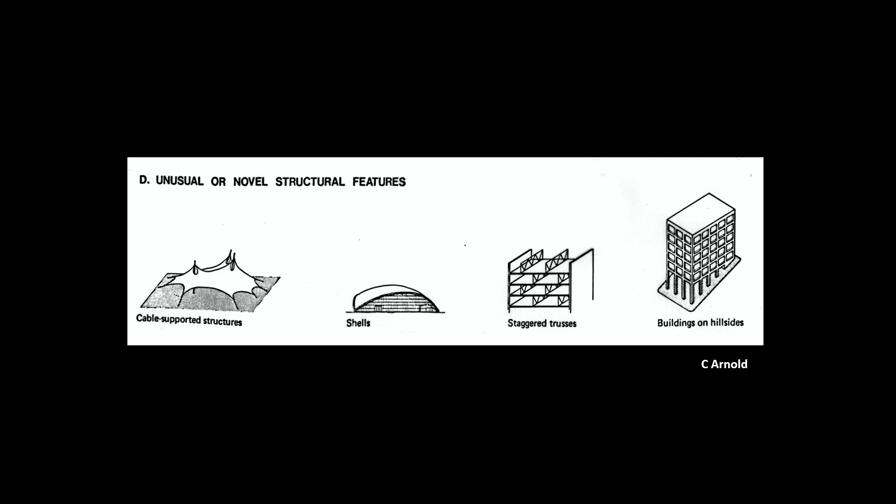In the words of Geoffrey Wood, one of the five founding partners of Ove Arup Partners: earthquake-resistant design is really a problem for architects.

Several years ago, the Institution of Structural Engineers Caribbean Regional Group, with support from the Pan American Health Organization and Dr. Van Alphen, hired Luigi Desano to deliver a series of three lecture programs - three-day courses held in Jamaica, Barbados, and Trinidad on base isolation. The first day of those courses was devoted to architecture. We invited the Barbados Institute of Architects, the Trinidad and Tobago Institute of Architects, and the equivalent body in Jamaica to attend. Not one single architect attended any of the courses in Jamaica, Barbados, or Trinidad.

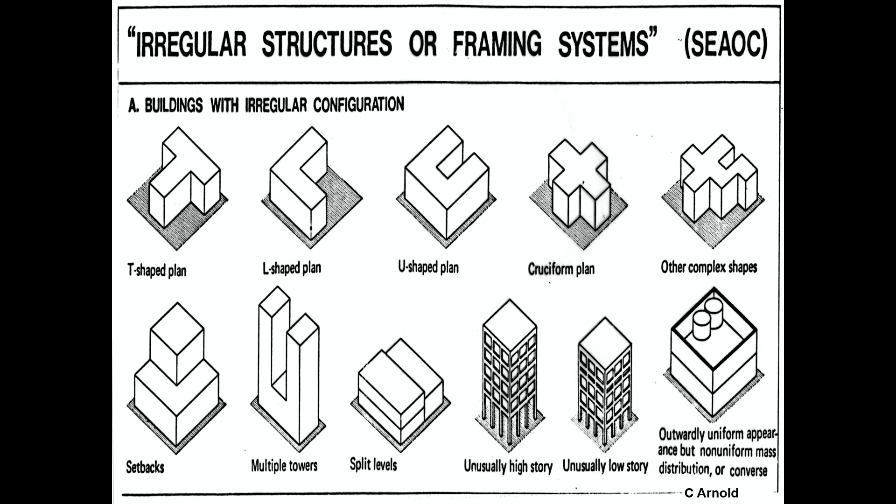But Geoffrey Wood said earthquake-resistant design is really a problem for architects. So either the architect has a better than usual knowledge of the basic principles of the conceptual design of earthquake-resistant systems, or the architect should involve the structural engineer in the initial discussions and development of the building concept.

That's the Central Bank in Barbados. It's not a correct representation because our Prime Minister, Tom Adams, at the time thought the building was too short. So after the model was built, he told the architect to add two floors - the actual building is two floors taller than that. But before Mervyn Awon, the architect, drew a line, Mervyn and I spoke about the building for two weeks. In those two weeks, Mervyn conceptualized the building in such a way that it made my life a lot easier in designing the structure. And the extra overcost of earthquake-resistant design of the structure, over simple gravity loads, was $0.

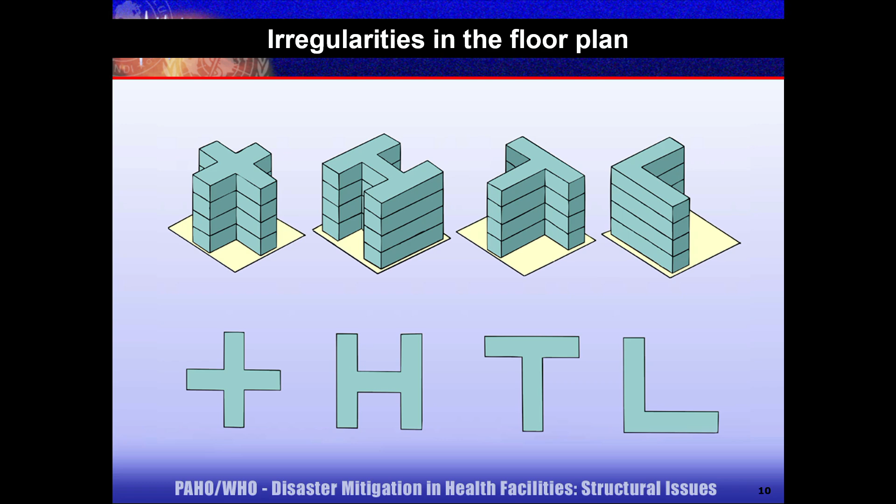Another famous engineer, Henry Degenkolb, who lectured in Trinidad in 1978 for a major conference at the Hilton, is emphatic in stressing the importance of configuration. He says: if we have a poor configuration to start with, all the engineer can do is improve a basically poor solution as best he can. Conversely, if we start off with a good configuration and a reasonable framing scheme, even a poor engineer can't harm its ultimate performance too much - so if you have poor engineers, make sure you have a good configuration. This last statement is only slightly exaggerated.

So what I have said so far warrants discussion among the various disciplines involved in the design and building processes. A Nicaraguan architect called Terran recommends that buildings be simple, continuous, symmetrical, straightforward, and repetitive. This advice is given not as an absolute, but as a qualitative factor that influences the reliability of the structure. Terran asks for understanding and knowledge among the disciplines, not the imposition of mandatory constraints.

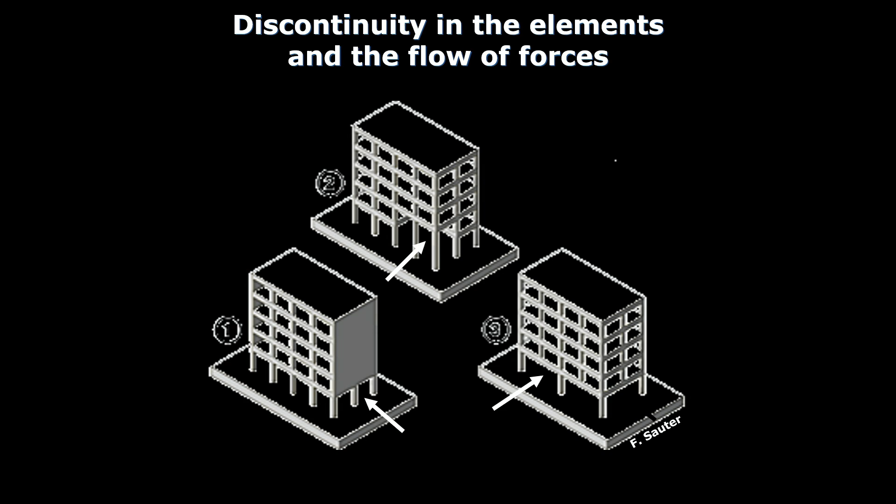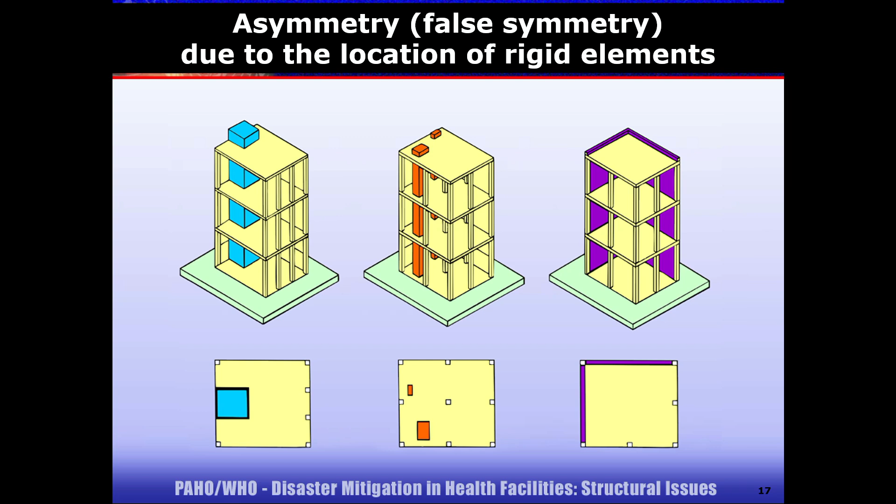Those slides and several others come from a very good package of slides from the Pan American Health Organization. It's the health sector that's interested in safe buildings, not the Ministry of Works, the Ministry of Health.

Now, that's a hotel at Heathrow Airport in London. That's a perfect shape for earthquakes. That circular hotel has shear walls around the perimeter, in a perfect location for resisting torsional forces. It's symmetrical. I don't think the engineer and architect were concerned about earthquakes, but accidentally they produced a perfect earthquake-resistant design for that aerial hotel at Heathrow.

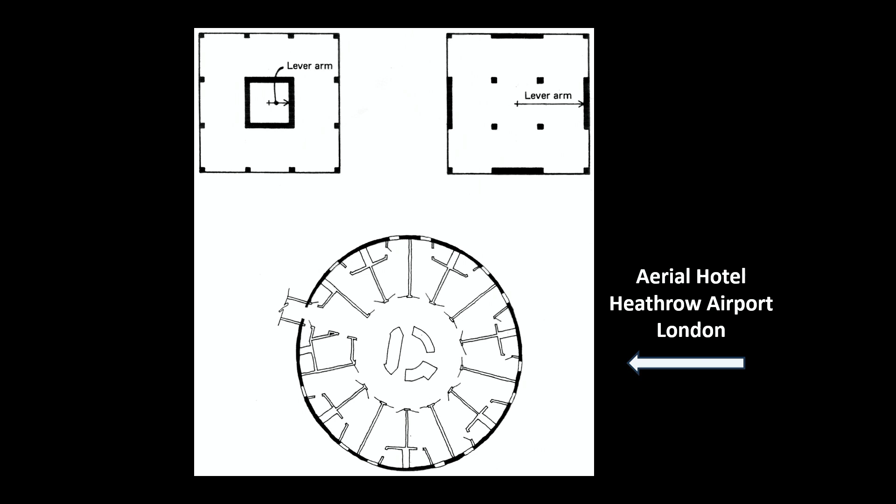I think Luigi spoke about soft stories at the Olive View Hospital. In the 1971 San Fernando earthquake, over 90% of the deaths occurred in hospitals, which is interesting. Olive View was rebuilt after that earthquake, to the best standards available in 1971. Then in 1994, when the Northridge earthquake occurred, Olive View Hospital was closed for a month to patients.

So even the best standards are insufficient if you don't have base isolation, because earthquake resistance depends on the failure of elements to absorb the energy. Soft stories kill people. They killed 18,000 people in the Izmit earthquake in Turkey in 1999.

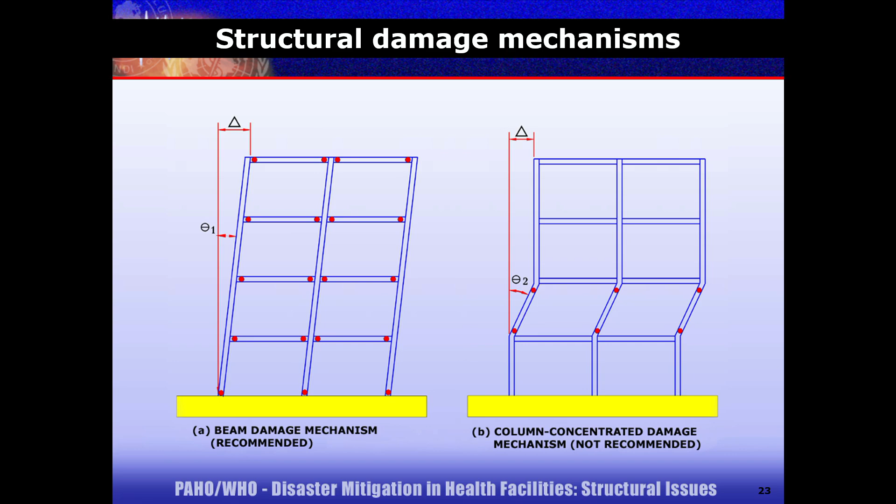Of course, most of a building is non-structural. Most of this building is non-structural, so we should really pay attention to the non-structural components as well. And that's outside of the realm of engineers.

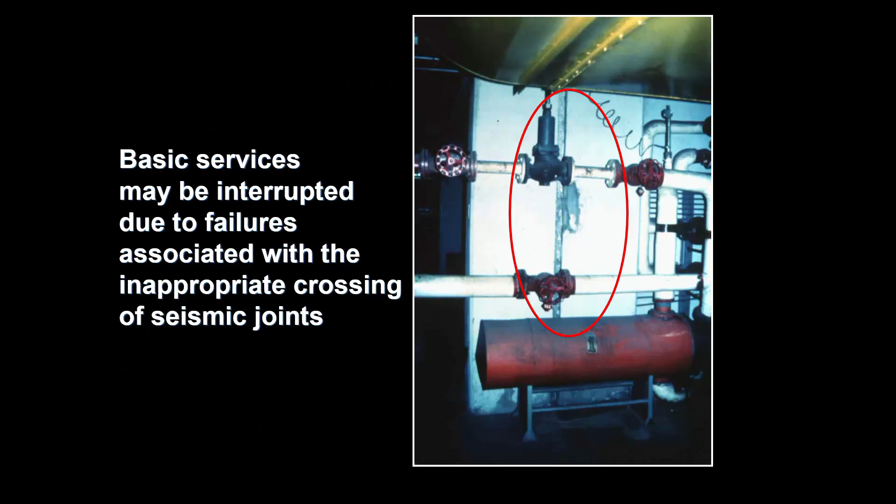This particular building is interesting because it has a 200 millimeter separation joint from the top to the bottom. It's a 15-story building. That's for earthquakes, so that one side of the building does not clash against the other side during an earthquake.

But the corridor between the bedrooms on both sides of the building has a ceiling that runs continuously across that joint. There have been four earthquake events in the 50-year history of this building, which opened in 1974. In the first event, the ceilings broke on every one of the 10 bedroom floors, and you saw this gash in the corridor, which alarmed the management, and they called our office in Trinidad and said, come and see what's happening—the building is falling apart, breaking in half.

So we came, and our report explained to them that there's a big joint there, but the architect had put a continuous ceiling across it. So it was just a ceiling to be repaired.

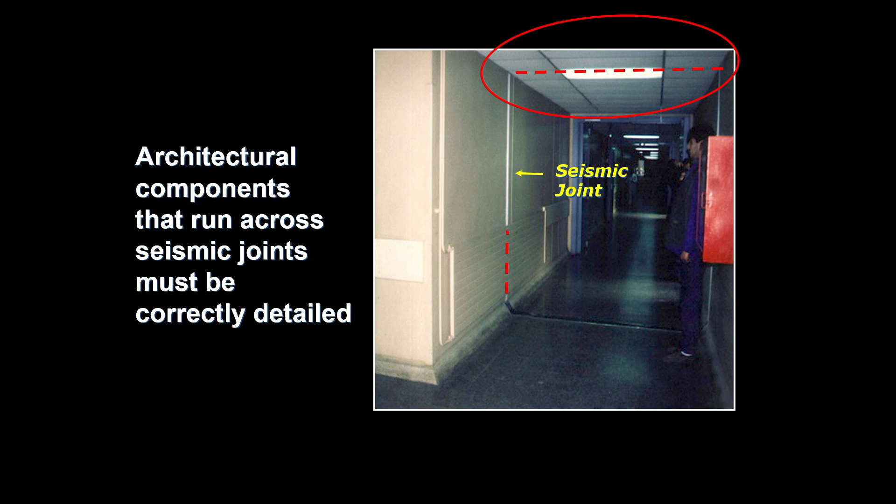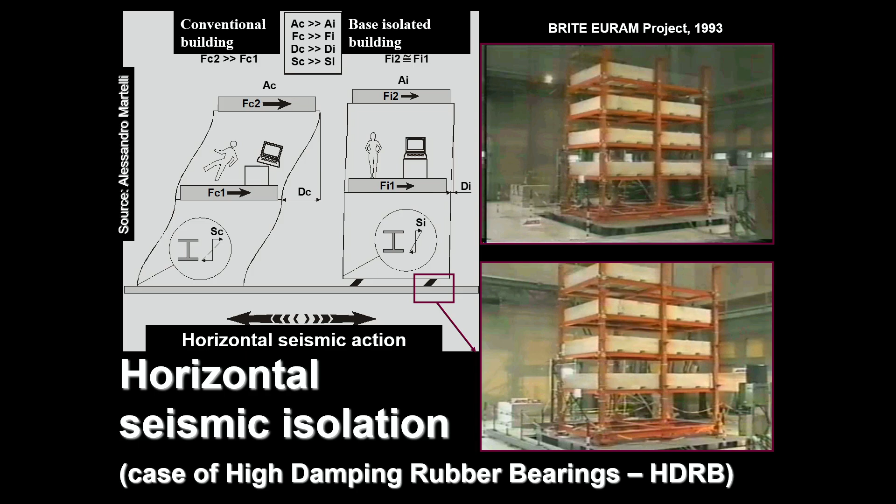And if you have an irregular building, then you go to Luigi and get it base isolated—or Shalini is doing that these days. That's a solution for those who want irregular buildings. By having base isolation, you avoid the excitement of being in a non-base isolated building. So which one would you prefer to be in—do you want the excitement, or do you want to have a dull life? You see.

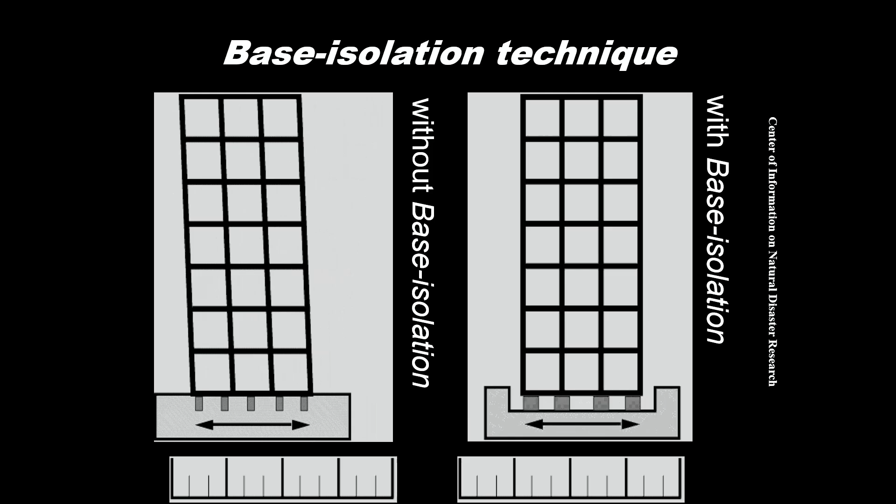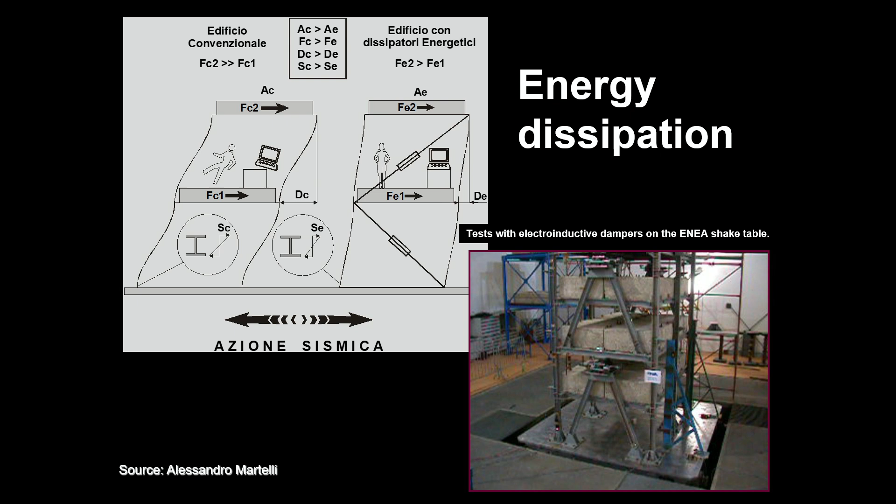So there are other ways of dealing with this. You could have energy dissipation with mechanical devices. I think I can show you some of those mechanical devices if I get this thing to work.

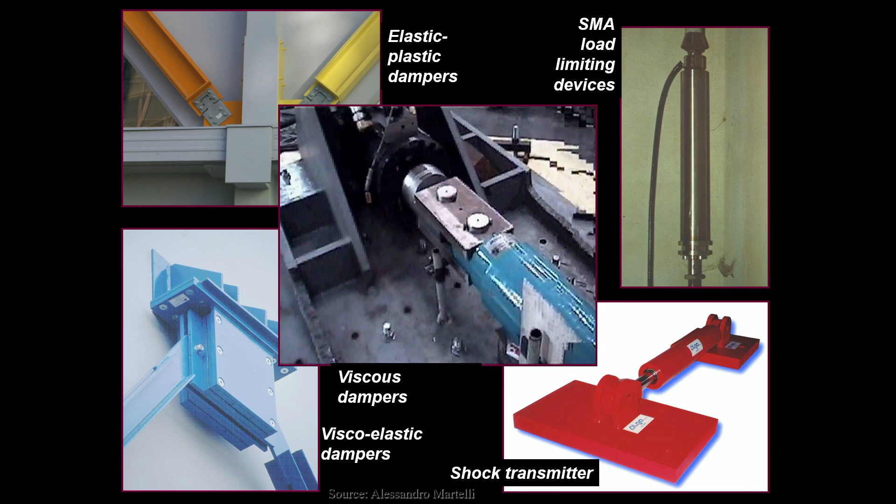The thing is to absorb the energy. After the Mexico City earthquake in 1985, the following year I went to Mexico City for a one-year commemorative conference. In the Social Security building, I saw that yellow thing there. There's a yellow device there, similar to what Luigi showed, to absorb the energy of the earthquake. That's a retrofit method.

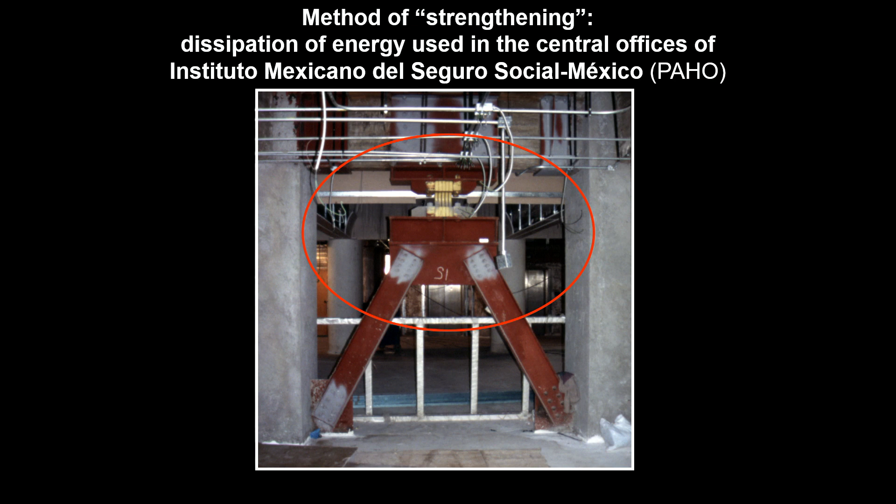That's really all I'm going to say, but my co-author will examine the problems for the architectural designer when confronted by earthquake hazard and some of the possible solutions to these problems. In the past 30 years, there's been inadequate attention to the earthquake hazard by the engineering community, and almost none by the architectural profession. It is hoped that in the next 30 years we will see all disciplines among design professionals paying much greater attention to earthquakes and much more collaborative design at the early stages of projects. Thank you.

As you are all structural engineers, most of you, you are the problem solvers. Today you've posed and given me a problem because I now start at the time I should be finishing. So I beg you to bear with me. As architects, we are usually the problem creators for the structural engineering, but however, we are problem solvers for other factors. So today I will attempt to explain to the engineers some of the problems, the reasons for the problems, and crave your understanding.

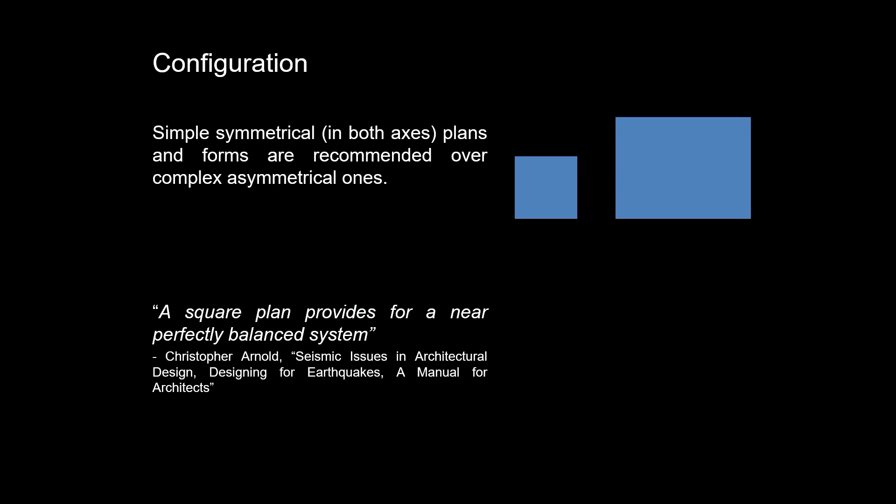From a seismic performance standpoint, simple forms and shapes, as Tony has repeated and said again, are recommended over complex ones. The top drawing, a square or a rectangle with proportions like 1 to 1, 1 to 1.5, are considered simple and preferable to the lower plans that are elongated, L-shaped, or H-shaped.

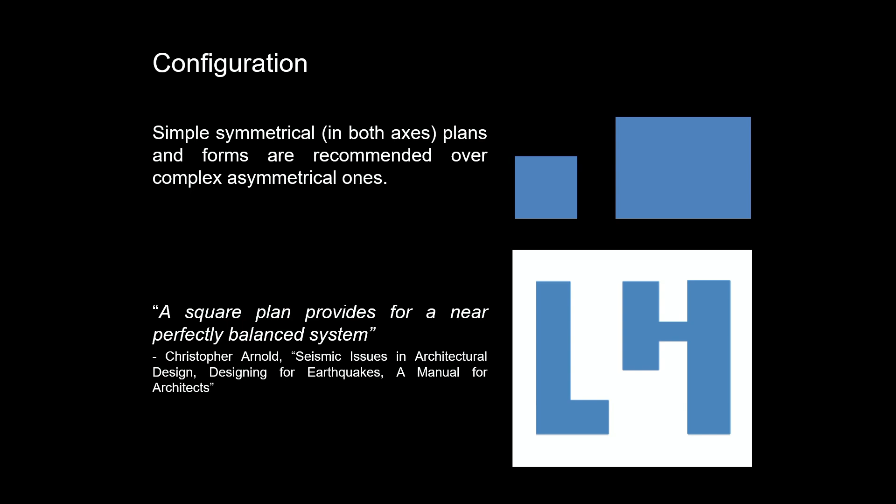Similar to what Tony has said about the design of hurricane-resistant designs, Christopher Arnold states a square plan provides a near-perfectly balanced system. He goes on to point out 9 configuration influences on seismic performance. The matrix to the right of these influences, redrawn from Building Configuration and Seismic Design by Christopher Arnold and Robert Reitherman, shows the 2 pairs of characteristics, horizontal and vertical, combined to define the 4 basic categories of building shapes.

Simple plan, simple elevation. Simple plan, complex elevation. Complex plan, simple elevation. And complex plan, complex elevation. They contend that all building configurations can be related back to this matrix.

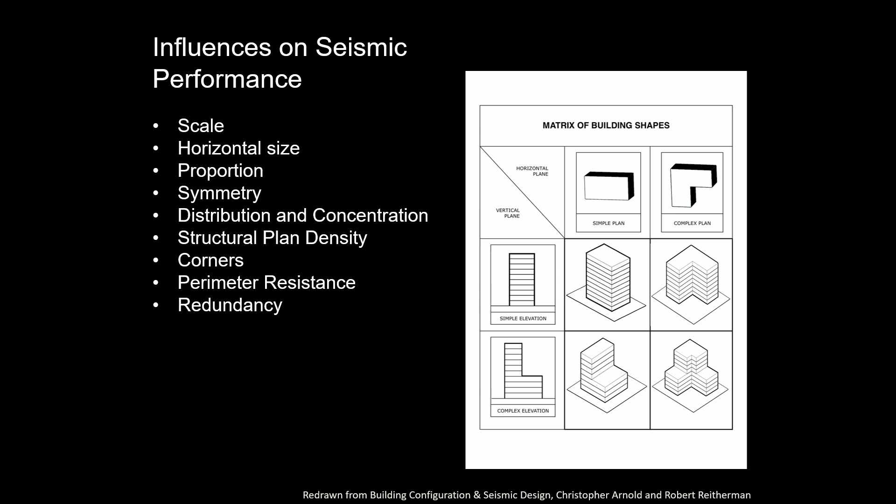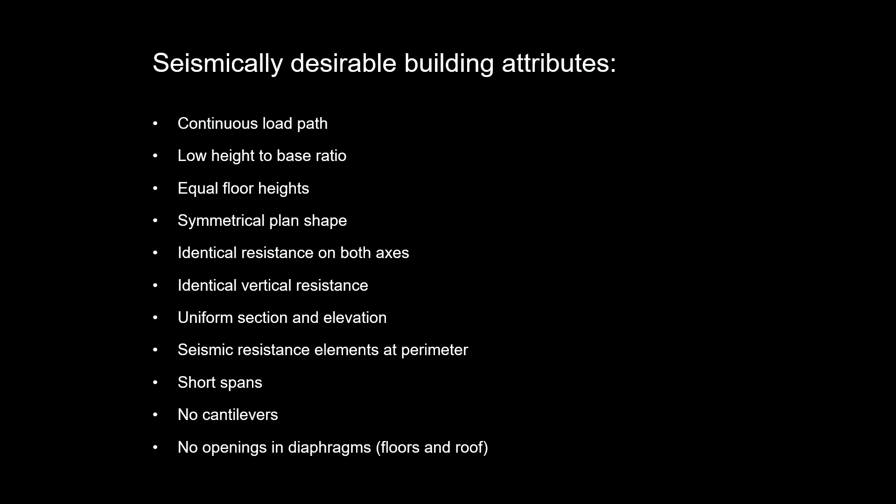Following on from Tony, I shall be repeating what he has emphasized to me several times. Since the ground motion is essentially random in direction, the resistance system must protect against shaking in all directions. In a building such as the one shown, in Barbados, the resistant elements are most effective when placed on the 2 major axes of the building in a symmetrical arrangement that provides balanced resistance. A square plan provides a near perfectly balanced system.

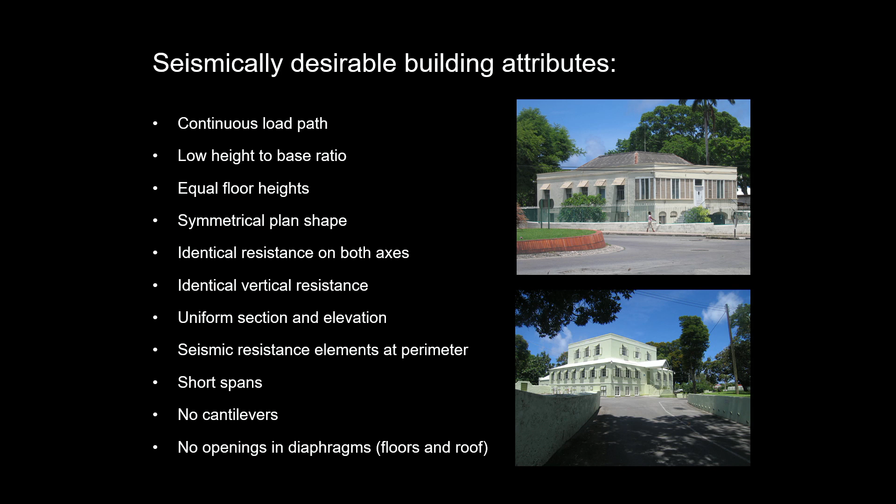With all these constraints—symmetry, uniformity, regularity, and repetition—would the architect's search for form and creativity be stifled and restricted to a bland, seismically desirable building? In the past, most buildings were symmetrical, uniform, regular, and repetitive.

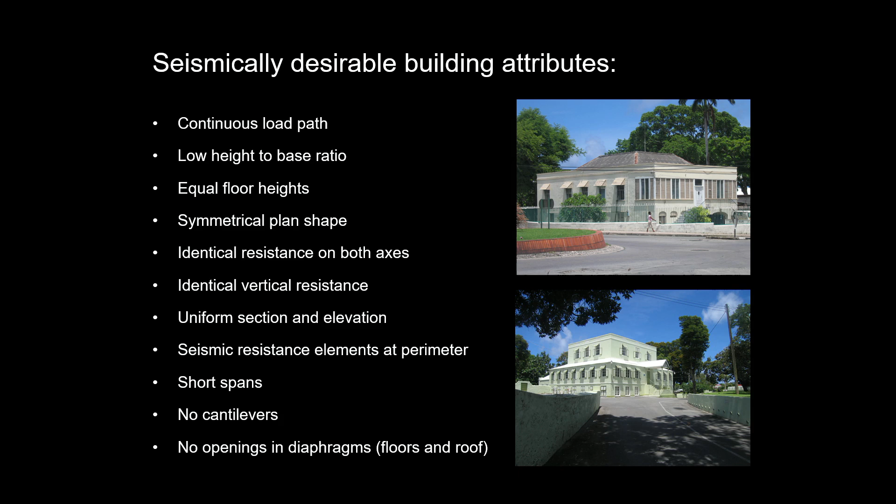Two great classical buildings, the Parthenon in Greece and the Pantheon in Rome, can be used as examples. The Parthenon was built between 447 and 438 BC and is around 101 feet by 228 feet, roughly a 1:2 proportion. It stood firm for centuries in an area of moderate seismicity. It is symmetrical about both axes. It has a dense perimeter of 20%. Structural density is the total area of all vertical structural elements—columns, walls, braces, etc.—divided by the floor area. It has a small span, and a great deal of material is brought down to the ground. There are no internally generated lateral forces due to arching or trusses. The interior space, however, is very small.

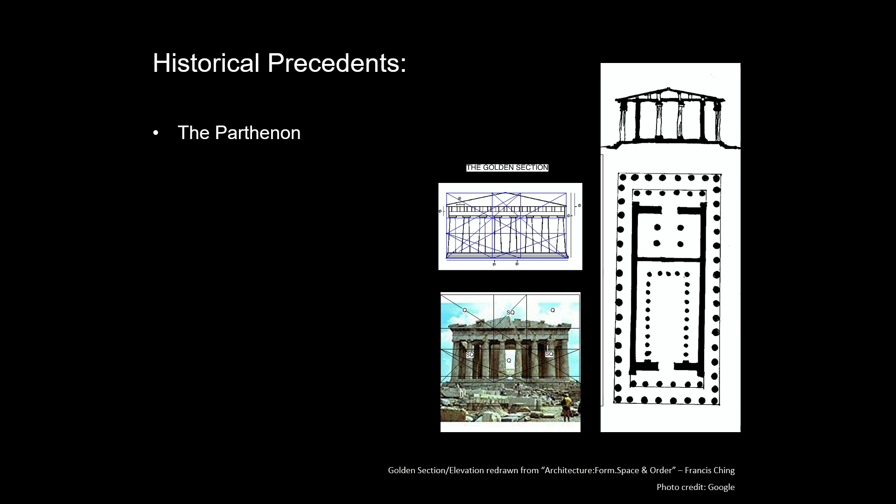The Pantheon has a span of 143 feet, the largest of antiquity, and for 17 centuries it was an extremely simple configuration: a cylindrical drum with a large span dome and a rectangular portico added to it. Its structural density is also 20%. Walls resist thrust through sheer mass. Extremely thick masonry walls can be more stable than one might believe. The vertical gravity force of mass is so great relative to lateral forces that the entire structure is kept firmly in compression at all times.

So, if we know the ideal configurations to reduce vulnerability and ensure safe buildings, why do we have so many buildings that do not appear to follow these principles? At least part of the answer, one could argue, lies with the 5 points of a new architecture.

As this conference looks back 30 years, I thought I would look back 100 years. What are these 5 points of a new architecture? The title refers to a set of principles developed in the early 20th century by architect Le Corbusier, in his manifesto, 'Towards a New Architecture,' published in Paris in 1926.

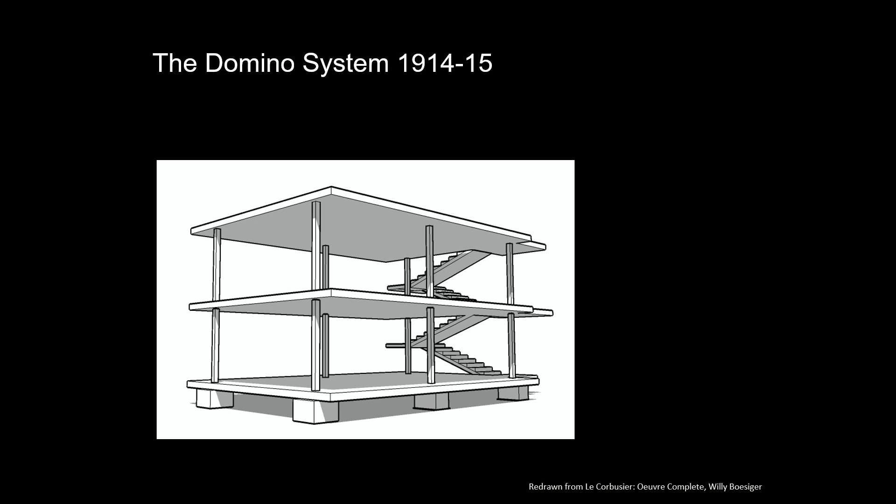The name domino was Latin for domus plus innovation, as well as a resemblance to the system of a pack of dominoes. The system was conceived as a solution to the post-World War I rebuilding problem. The domino system demonstrates Le Corbusier's awareness of housing not only as an important social and architectural problem, but also as an industrial process. Construction would be transformed into a scientifically run large-scale activity where it could be reproduced very quickly.

So what are the 5 points of architecture?

Point one, raising the building on pilotis. The right-hand plan shows the old type of building fixed to the ground with continuous foundations. The left-hand plan indicates a new possibility by raising the building floor slab up on pilotis supported on individual footings. The old ground floor is freed for landscaping, vehicular circulation, services, and other things. As Le Corbusier stated, the rooms are thereby removed from the dampness of the soil. They have light and air. The building plot is left to the garden, which consequently passes under the house. This would be ideal, if not for earthquakes, for areas like our climate.

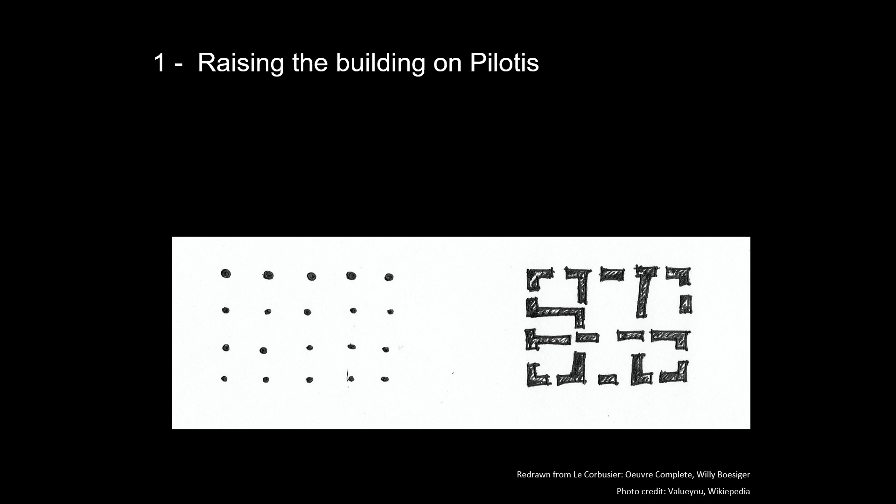Two, the open plan. The right-hand sketch shows a traditional load-bearing walled floor plan with small rooms, narrow openings, and thick walls. The left-hand sketch shows the new possibilities and flexibility as the walls are separated or freed from the structural support system, the columns. The entire composition now appears light and airy.

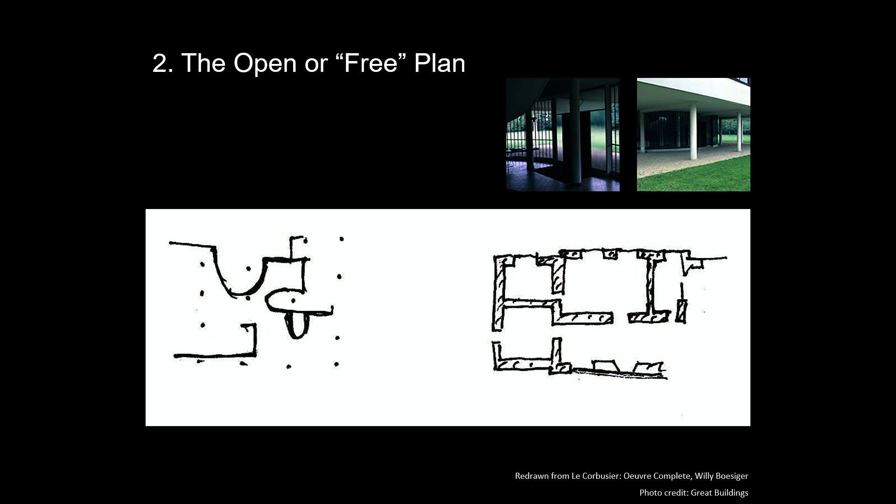Le Corbusier describes point 2 as follows: the free designing of the ground floor plan. The support system carries the intermediate ceilings and rises up to the roof. The interior walls may be placed wherever required, each floor being entirely independent of the rest. There are no longer any supporting walls, but only membranes of any thickness required. The result of this is absolute freedom in designing the ground floor plan. That is to say, the free utilization of available means, which makes it easy to offset the rather high cost of reinforced concrete construction.

The roof terrace satisfies a number of demands: a rain-dampened layer of sand covered by concrete slabs. And the roof gardens display highly luxuriant vegetation, shrubs, and even small trees up to 3 to 4 meters tall can be planted. In this way, Le Corbusier says, the roof garden will become the most favored place in the building. In general, roof gardens mean to a city the recovery of all the built-up areas.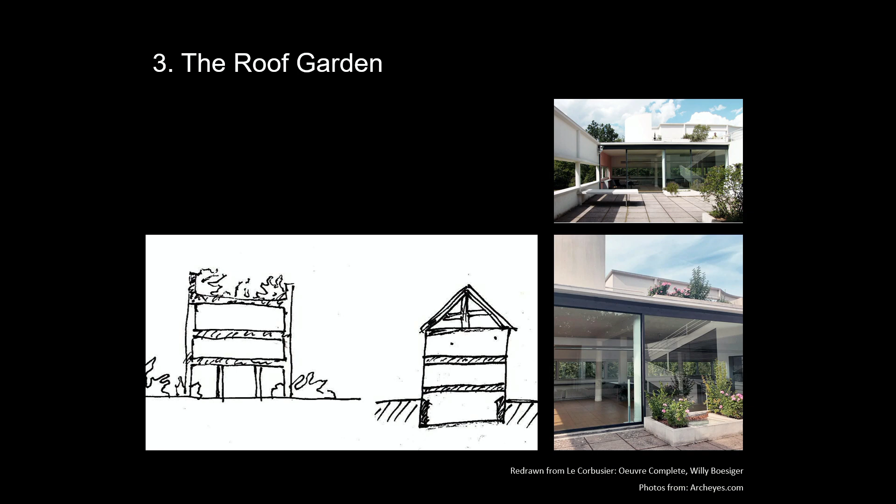Le Corbusier says, by projecting the floor beyond the supporting pillars, like a balcony all around the building, the whole facade is extended beyond the supporting construction. It thereby loses its supportive quality, and the windows may be extended at any length without any direct relationship to the interior.

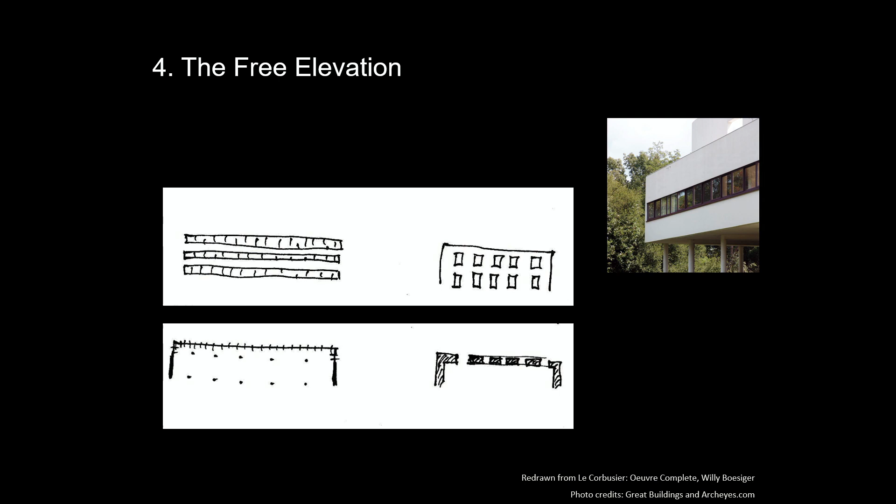Together with the intermediate ceilings, the supports create rectangular openings in the facade through which light and air enter copiously. The window extends from support to support and thus becomes a horizontal window.

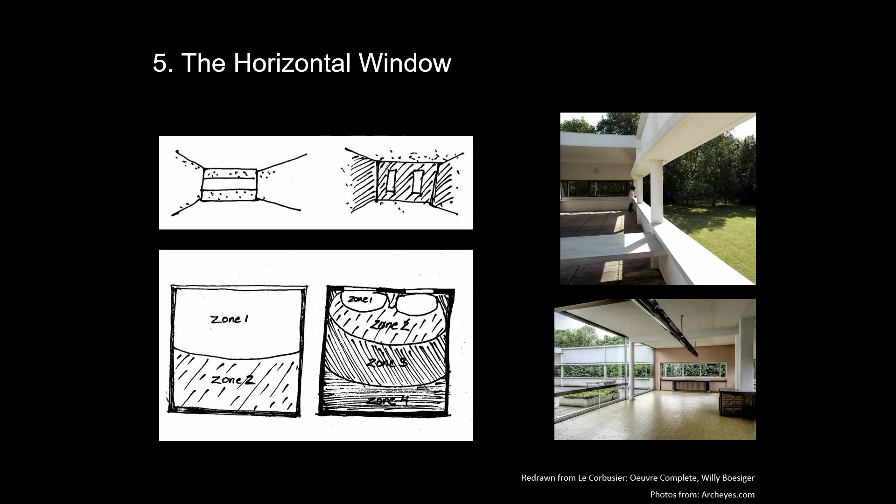The overall concept for the new architecture, the new aesthetic, is realized and epitomized in the Villa Savoye, built almost 100 years ago. Wikipedia describes the villa as the building that most succinctly summed up Le Corbusier's 5 points of architecture, which he elucidated in the journal L'Esprit Nouveau and his book Towards a New Architecture, developed throughout the 1920s.

First, Le Corbusier lifted the bulk of the structure off the ground, supporting it by pilotis. These pilotis, providing the structural support for the house, allowed him to elucidate his next two points: a free facade, meaning non-supporting walls that could be designed as the architect wished, and an open floor plan, meaning the floor space was free to be configured into rooms without concern for supporting walls.

The second floor of Villa Savoye includes long strips of ribbon windows that allow unencumbered views of the large surrounding yard, constituting the 4th point of his system. The 5th point was a roof garden to compensate for the green area consumed by the building, replacing it on the roof. A ramp rising from the ground to the 3rd floor terrace allows for an architectural promenade through the structure.

This new movement created a new architectural aesthetic and was multifaceted: technical, economic, social, psychological, and political. It gave aesthetic validity to a very economical, unadorned rectangular box for all building functions and emphasized thinness, the aesthetic of delicacy and slenderness that steel and concrete structure had made possible.

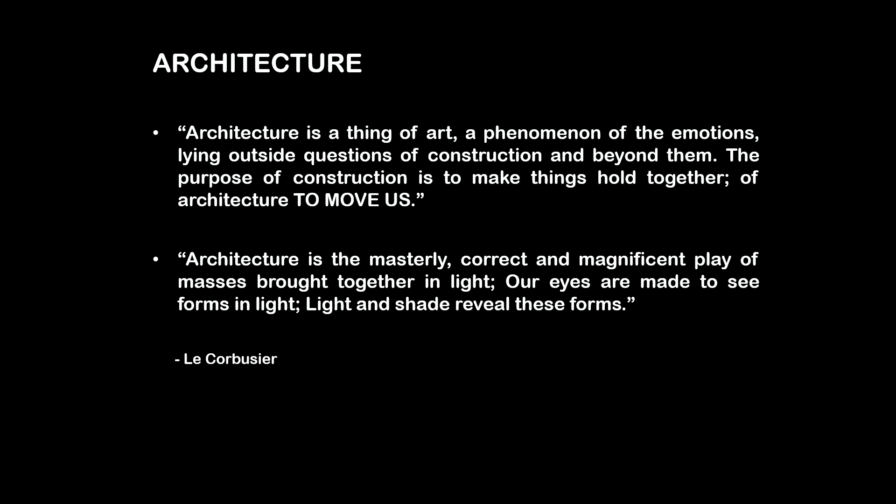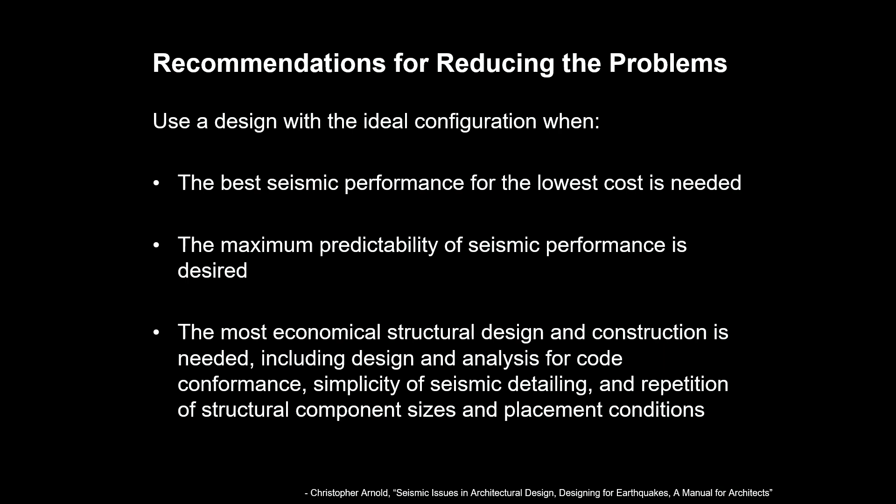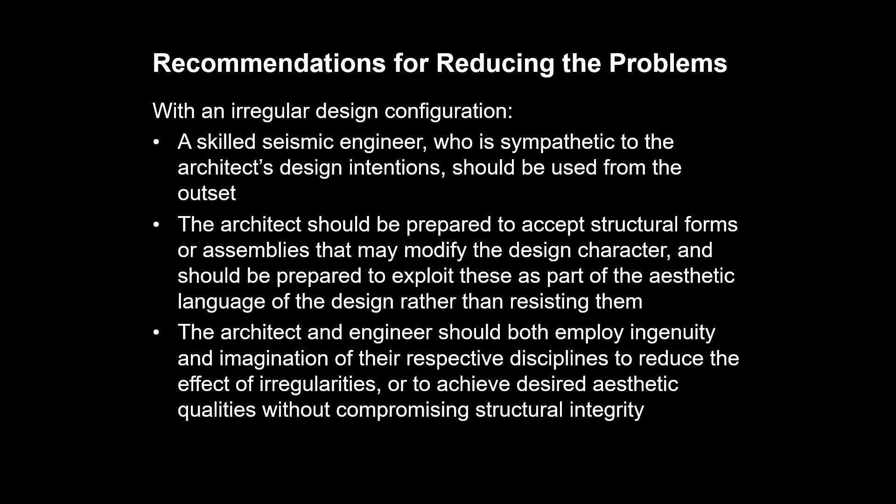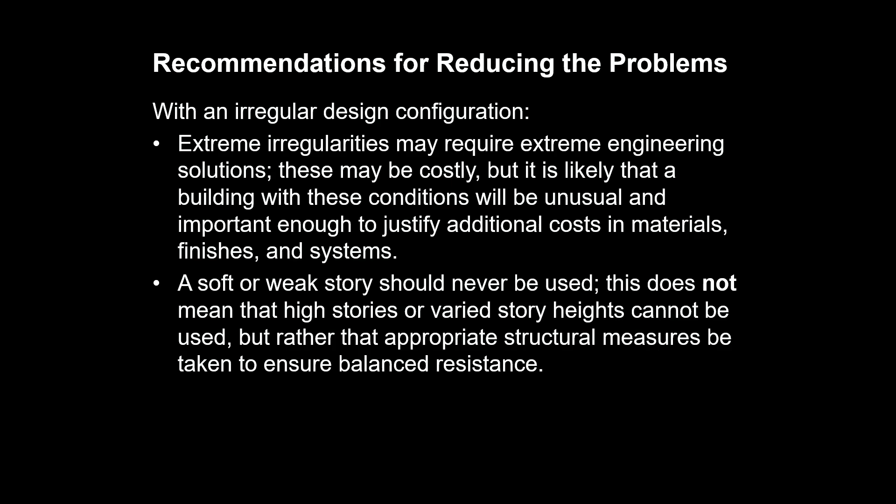So to close, I will use another Le Corbusier quotation that speaks to the important role of both the architect and the engineer. The engineer, inspired by the law of economy and governed by mathematical calculation, puts us in accord with the universal law. The architect, by his arrangement of forms, realizes an order which is a pure creation of his spirit. By forms and shapes he affects our senses to an acute degree and provokes plastic emotions. By the relationships which he creates, he awakens profound echoes in us. He gives us the measure of an order which we feel to be in accordance with that of our world. He determines the various movements of our heart and of our understanding. It is then that we experience the sense of beauty.